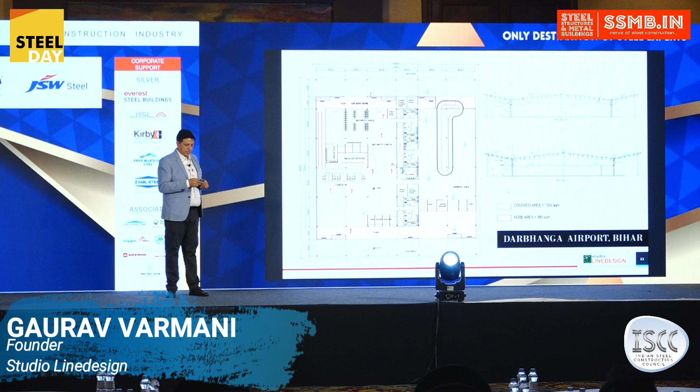The aesthetics were also being governed by the local department when they were connected. They all had their different expectations and aspirations as far as the glass facades were concerned, and how their look would come out to be. So that also had to be addressed in conjunction.

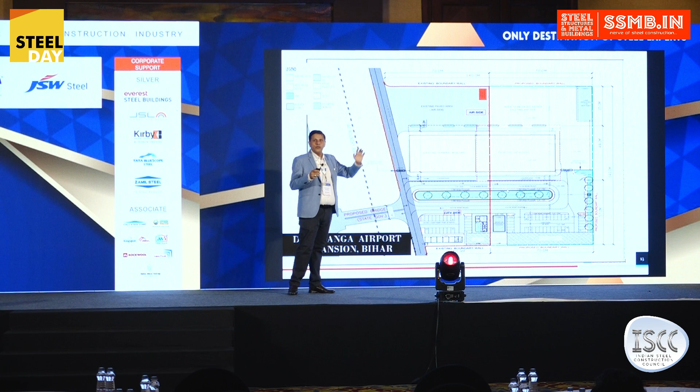And now they have even started on the expansion. I'll just show you. So this is where the site was initially. This left side is the existing airport which came in, and now the expansion is happening. It had to be designed in such a manner that it could easily be expanded without disturbing the operations.

So the setting out of the building was in that context itself - where the proposed land will be, how we will be building in future, so that it does not impact the expansion processes and the future which will come in.

We were always being pulled around with the pricing, budgets, and delivery schedules, because being a remote location, the site had to be finished in a limited time. The construction was going on in between the pandemic period.

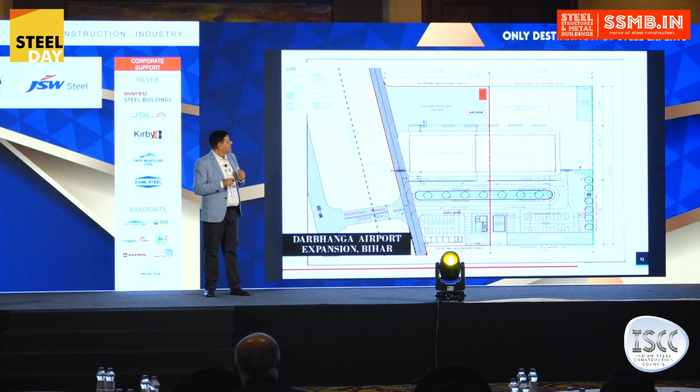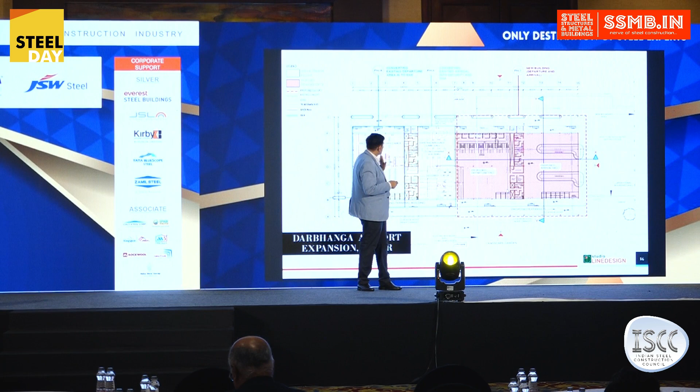And this is how it is being now expanded. So this is phase 1. And for phase 2 now, this particular area, which was the arrival lounge, is also being added to the departure lounge. Because once they started operating, they realized that the departure lounge was the biggest area which was required, and that was falling drastically short.

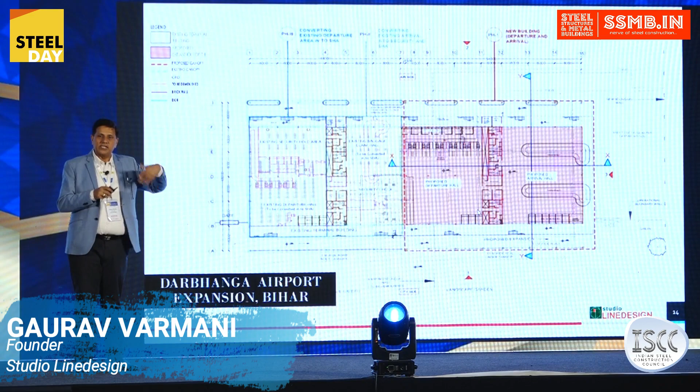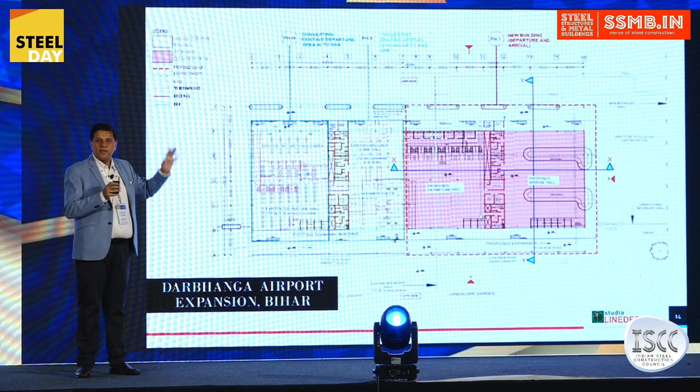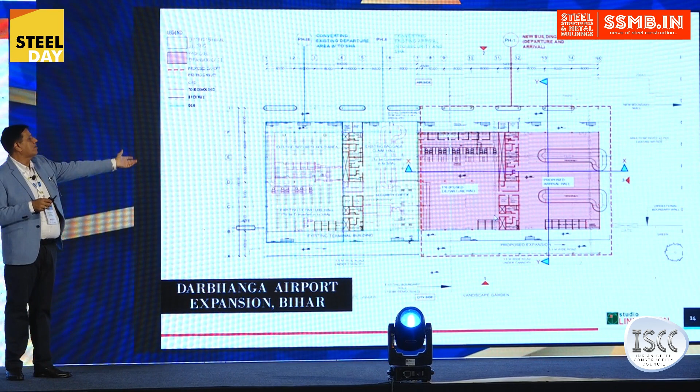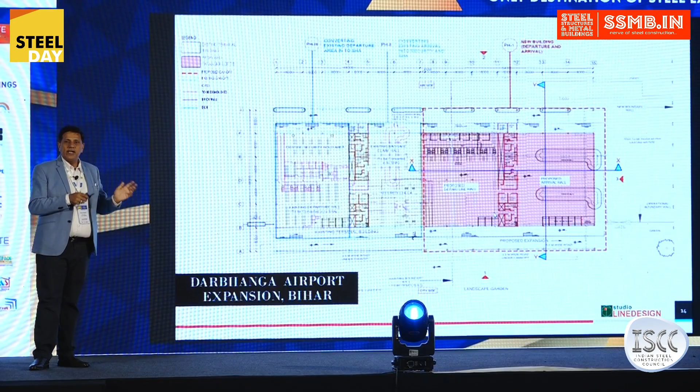So now, out of the full airport, earlier it was like 60-40. Now it will be like 80% departure areas and only 20% arrival areas. So just the extreme corner right is for the arrivals, where instead of one belt, they'll be putting up another 2 belts there. This belt will move to the corner, and then we'll have a much larger departure lounge, and the similar facade will get expanded and repeated and extended there.

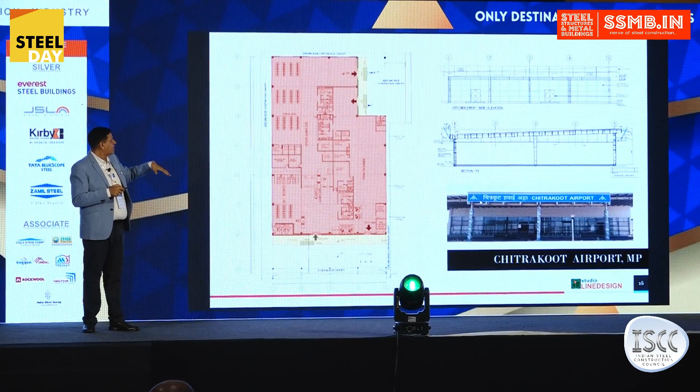So that was one. Coming to the next airport, the Chitrakoot airport. Here the total site was different. The facade and costings had to be kept in the same domain, but the orientation was totally different. Now we had a linear building. Earlier the building was horizontally expandable; this is a linear expansion.

We were again space crunched, because from the city side it had to be both ways - the departure and the arrival had to be on the city front. The front given was much smaller. The roof directions were not conducive, and we had to even plan for the expandability. This resulted in a costlier and not so economical structure, but then we did it.

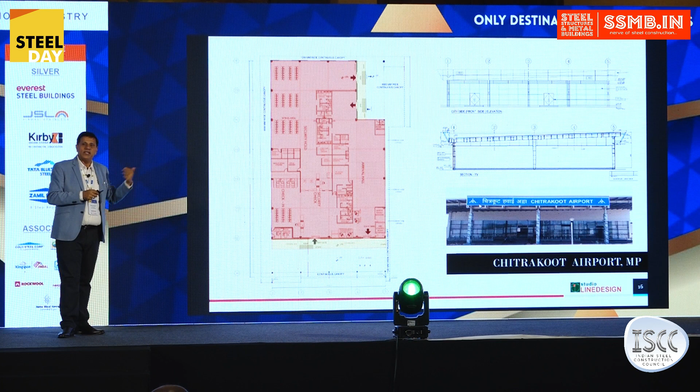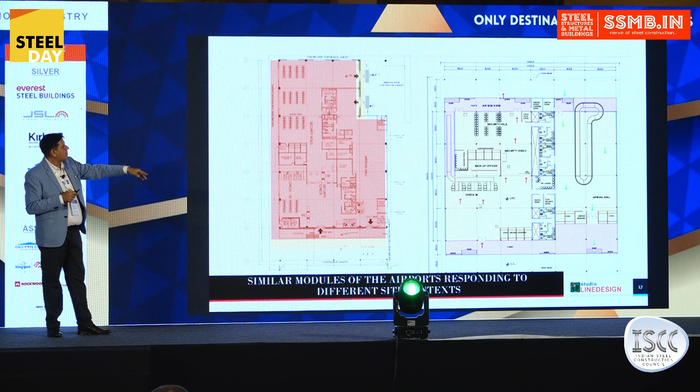This is the third airport where we are. This took the longest time because they wanted a very different aesthetic, and the expectations of the local department officials were very different. So this particular fascia had to be designed just to cater to and cover up the different slope, which was not in the direction of the natural gradient of the portals.

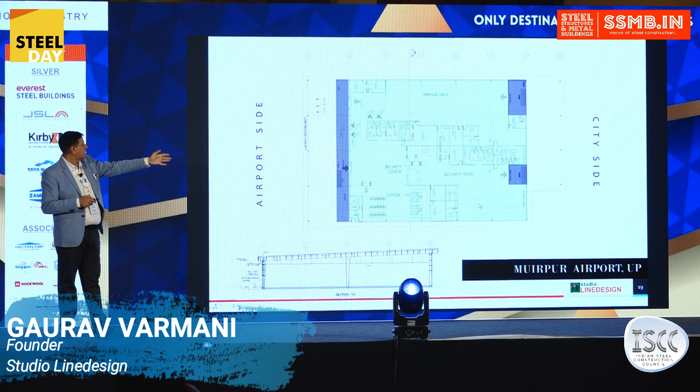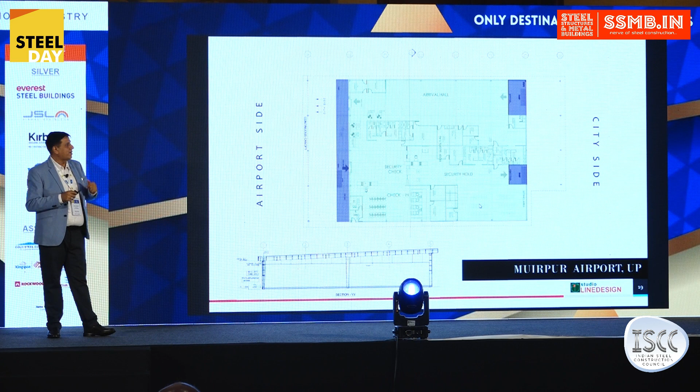This was in the other direction - again the airport side and the city side - and the gradient was in a different direction because economy had to be taken into consideration. At the same time, the aesthetics were being demanded by the department officials. So I would like to sum up here - as Studio Linedesign, we want to design responsible, sustainable structures for a better tomorrow. Thank you.